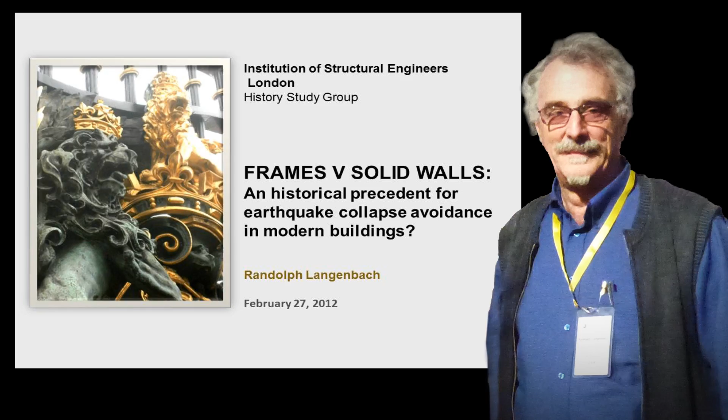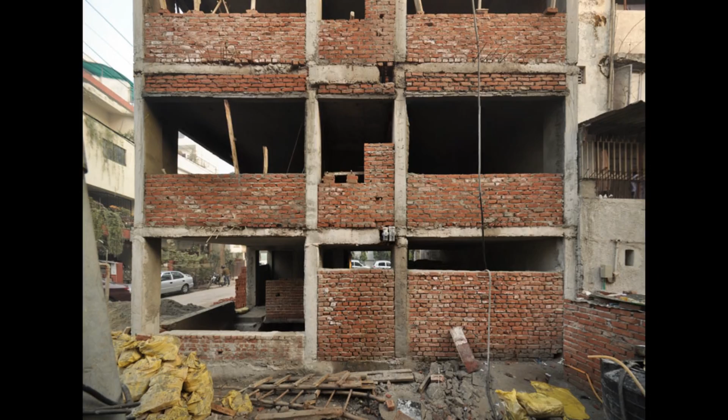So here we now move forward. In my talk, I'm going to be talking actually quite a bit about modern buildings. By modern, I mean built in the last 50 years or so, rather than just looking at things historically. But I'm going to be making a crucial comparison.

As you've seen in the last 4 or 5 months, we've had a series of earthquakes, and one in eastern Turkey, in Van. What are the images that are coming out? They're concrete buildings. Not only have they fallen down, it's really with concrete frame construction that the term pancake collapse was invented, because the floors are so strong.

And of course, when they do fall down, it's very hard to extract the survivors, because the floors, as you see here, often very thick, are so hard to even drill through.

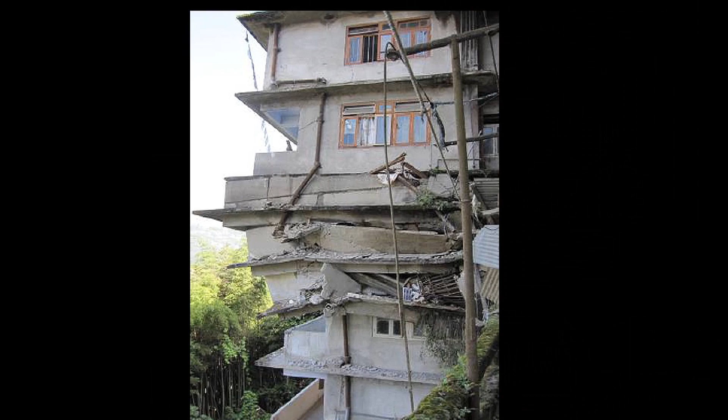The Van earthquake reminds me of the 1999 earthquakes further to the west in Anatolia, where it's building after building on the ground. And then very soon after that, the one in Sikkim, in the Himalayan chain in North India, which extended with damage in Bhutan and in Nepal. Same thing, concrete buildings.

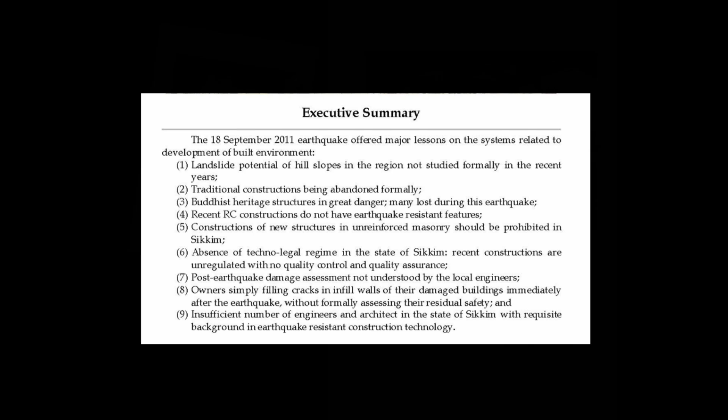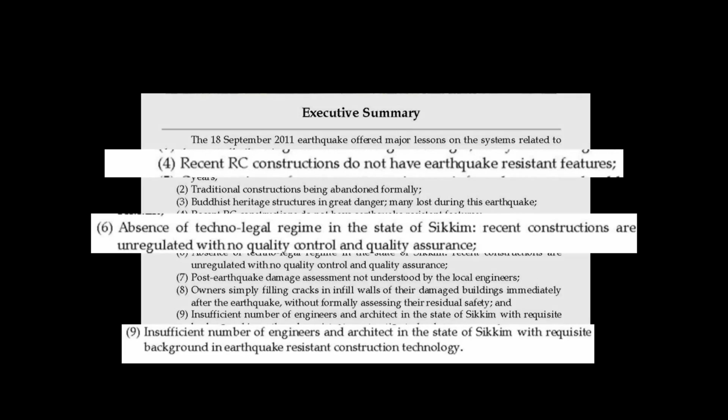Now, it's really interesting to look at the professional reconnaissance report that was done by an engineering team, the Indian engineers who went there to look at it, and I do know one of the engineers on this team. Not only are they observing that the reinforced concrete buildings don't have earthquake-resistant features, and remember, the Himalayan chain has been identified as an earthquake hazard area for generations, they don't even have structural engineers in that part of the country.

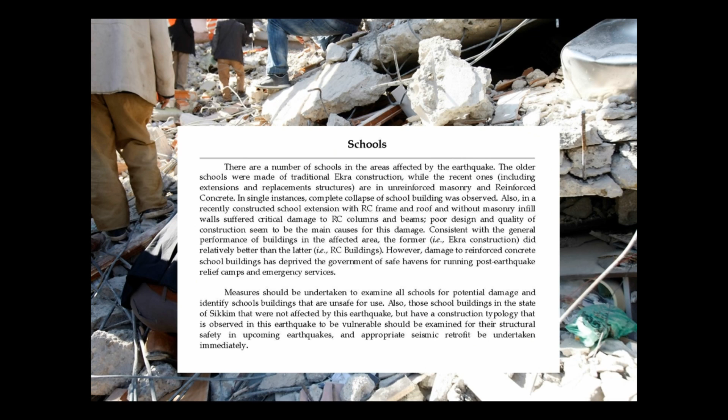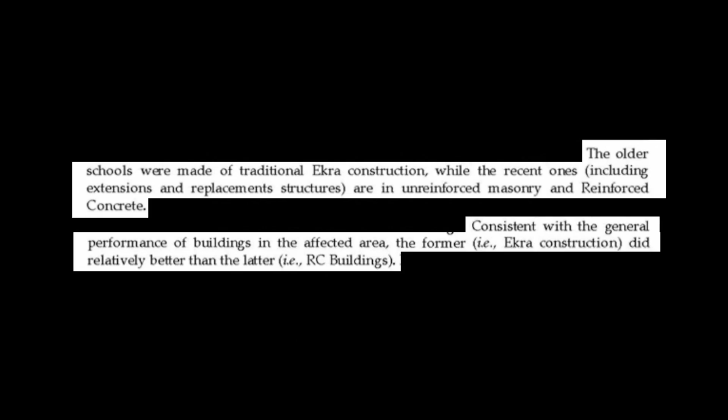So in this report, they recognize this traditional Ekra construction, as they call it there, which from what I could tell is a little closer to wattle and daub medieval construction here than to infill masonry. But never mind, it's easy to then keep going and realize that schools are one of the most vulnerable assets we have, and it puts all of the children at risk, whether it's Italy or India or Turkey or you name it. We've had schools being a particularly vulnerable building type.

But you'd think that they would do better with modern buildings. And in India, there's the terms PUCCA and KATCHA. KATCHA for cheap or impermanent construction, and PUCCA for permanent construction, which is now often identified by people as being reinforced concrete or concrete block masonry.

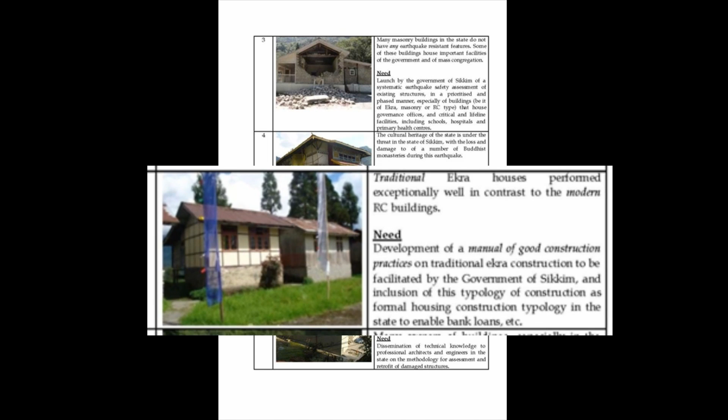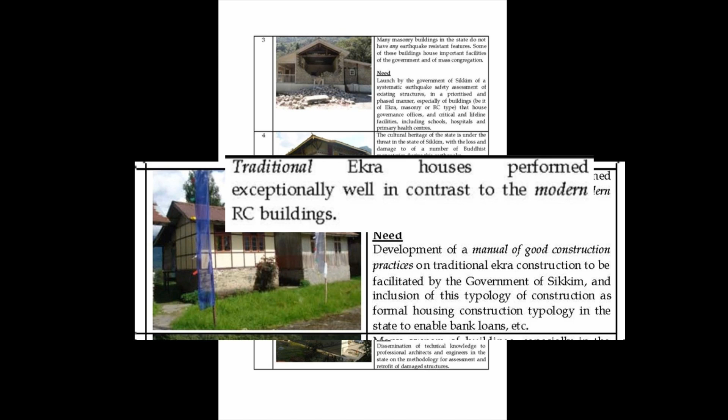Well, look at what their observation is. The Ekra houses are the ones that performed. Traditional means of construction that this report even advocates be resurrected in this area and put alongside modern concrete construction, which itself should be improved.

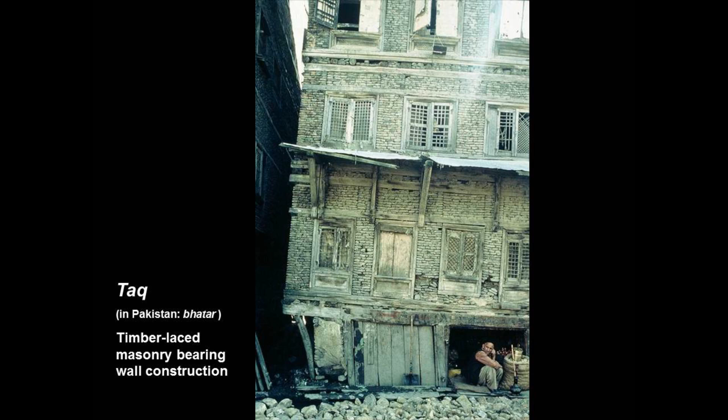We shouldn't use the term archaic construction anymore when we're dealing with this, because it has so much to teach us in terms of how we even improve our current forms of construction. So moving on, that's one of the pictures that I shot in 1981.

And I often have shown this at the beginning of a talk and say, you know, how can you ever believe that this would be earthquake resistant construction? Never mind, is it even resistant to static failure?

So, when you get into it, you even see that the masonry piers do not line up, which would be anathema in a bearing wall masonry building. But this is bearing wall masonry, and by all calculations, that would be a soft story. And so the timber is so critical here.

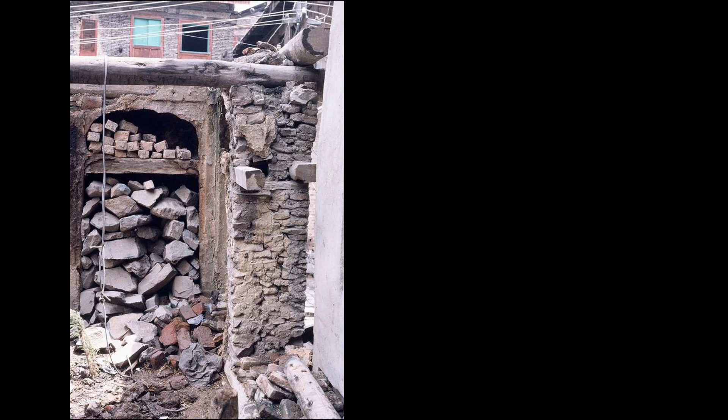We are dealing, in fact, with reinforced masonry construction, but coming from a building tradition that goes back hundreds of years in an area of northern India where timber does exist, does grow. It's a mountain climate, and the Vale of Kashmir is a fertile plain. The reason why these buildings were there is because it was a fertile plain, but it was a prehistoric lake bed, much like Mexico City is a lake bed, and so this is an extremely soft soil site.

This construction was not invented for earthquakes, I believe. I don't have any proof one way or the other, but it was invented for building buildings that would last on a soft soil site. And that's why I think we're seeing the timber armature there. And you can see the effectiveness of this when you realize that this building here is a bearing wall masonry building. It's not a veneer, it's not a frame structure.

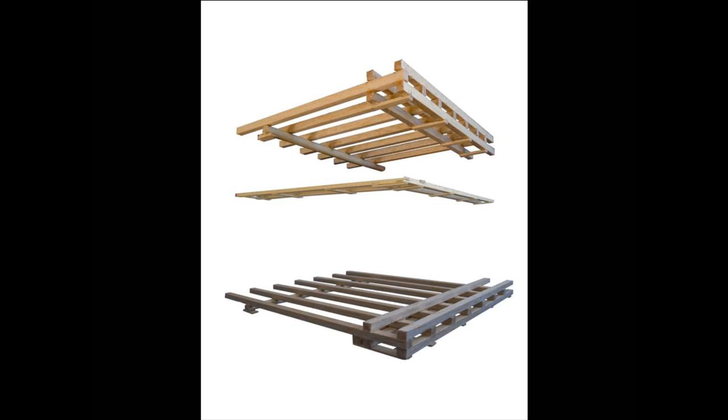So how is that done? This is what I determined is the way those internal frames work. They've been very effective in creating, through just the weight of the wall, a tie-in with a floor diaphragm, which is all, of course, appropriate for contemporary construction today. And that's where they fit, above the windows and at the floor levels in many of these structures.

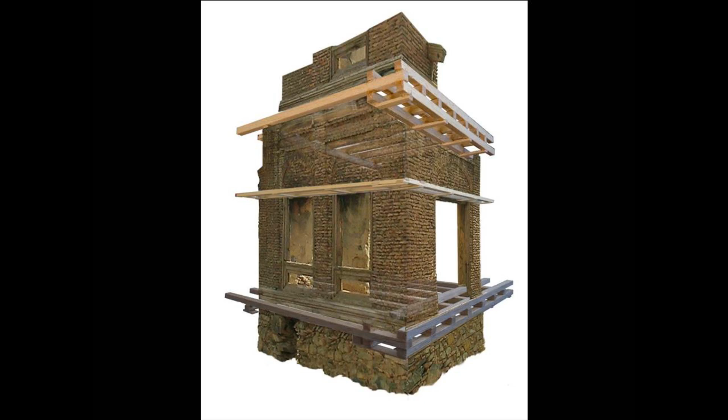This, I determined the best word they had for it was taq construction, which was not exactly an engineering term there, but I found no other. It just seemed to be a construction technique that people did. Looking at the buildings, we're not dealing with short buildings here. They went 3, 4, 5, sometimes 6 and 7 stories, and these are bearing wall buildings.

This one here, you can see where the floor beams are extending through the wall and being sandwiched between the timbers front and back of the thickness of the wall. Absent this kind of structure, you can see that the buildings tend to come apart just from the soft soil site.

And in 1885, there were historical records where visiting British travelers commented on the earthquake they experienced, that these seemingly rickety, tumble-down buildings had resisted the earthquake, whereas the palace in the more British style of unreinforced masonry had fallen down. At the time when I discovered this, I'd never myself investigated earthquakes, I'd not been in a reconnaissance, I'd not really studied contemporary earthquakes. That has come in the last 30 years since I first went there.

Turning to Nepal is very interesting because they don't share this building tradition, even though they share a part of the real estate of the mountains of the Himalayan chain. You see an example here of how the whole building in Srinagar is leaning as a unit, and here in Kathmandu, in the absence of having that kind of ring beam or a tie around the whole building, the building tends to come apart.

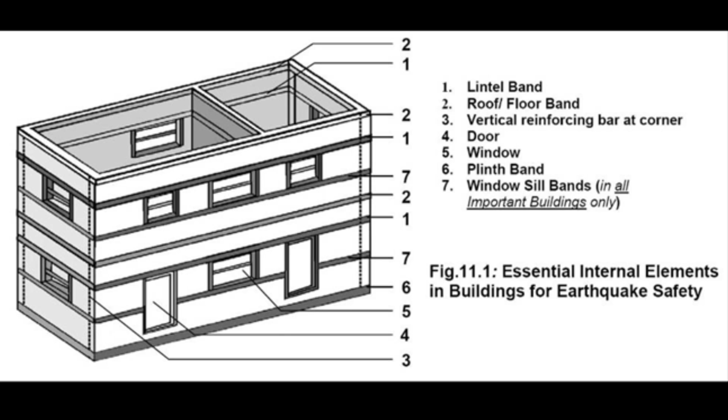But what I found interesting, and some of you who've been involved perhaps with India may know Professor Anand Arya, who was instrumental in getting this material into the code and recognizing essentially what they call rules of thumb for traditional construction, non-engineered construction as they call it, in India, because it's so fundamental to housing the people.

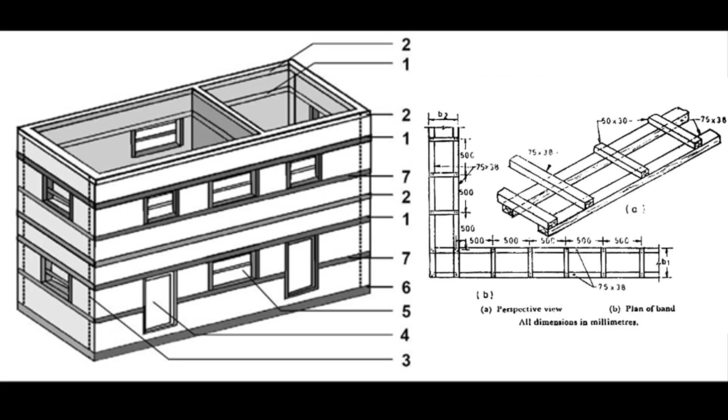But for some reason, they don't recognize the floor capture, the double layer of timber with the joists and the beams coming through. And I've never been quite sure why. In my conversations with him, I think it was just something where they would themselves know it, but hadn't really gotten into that level of detail.

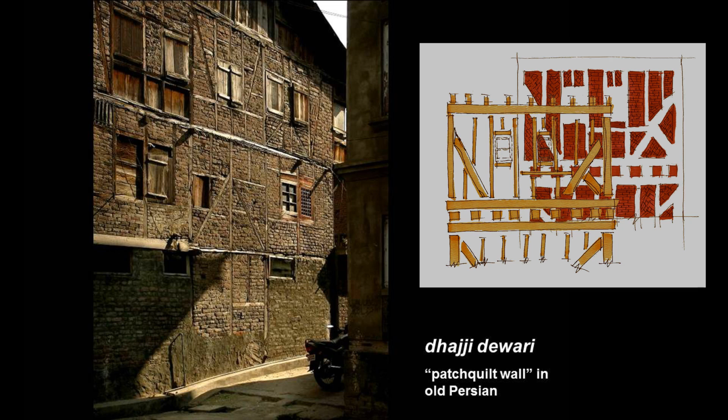So the other system is known as dhajji dewari, and this is a much more appropriate term to the system. It comes from their textile industry background, patch quilt wall, from what it looks like. But that's really interchangeable with the English term of half timber. And you find Fachwerk in Germany and Colombage in France and so on. Almost every society in the world has a version of this form of construction.

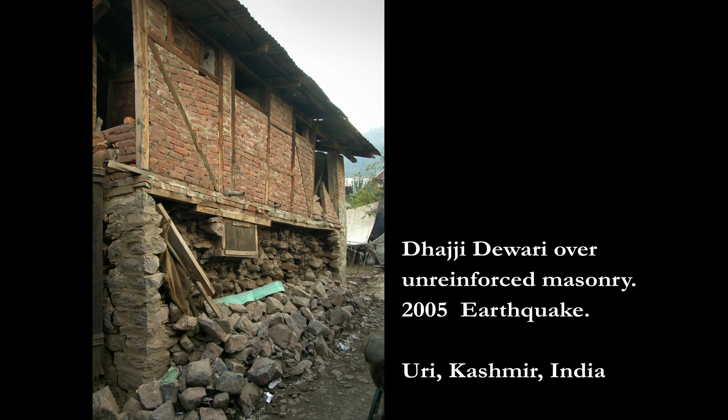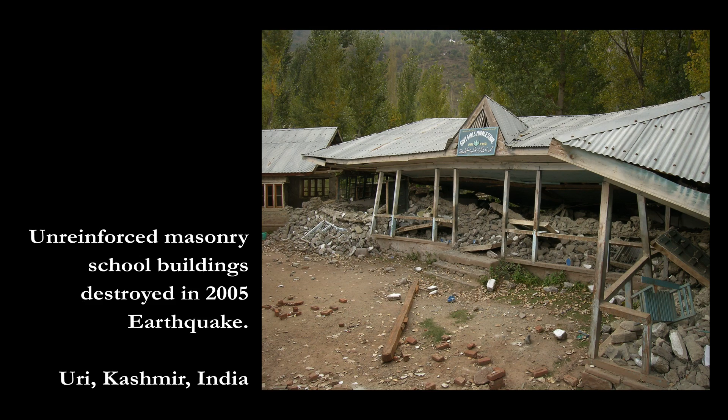Now, the first demonstration in my lifespan where I could look at the performance of this in the field was, of course, the 2005 earthquake in Kashmir, where the epicenter was in Pakistan, and I'll get to that a little bit later. But on the Indian side of the border, in Uri, I did find this example, and you see that the dhajji floor, only at the top, where it was unreinforced masonry below, that floor formed a bridge over the failure of the wall below.

Again, interestingly enough, it is recognized in the Indian Building Code. But like the other one, it doesn't talk about the floor diaphragm connection.

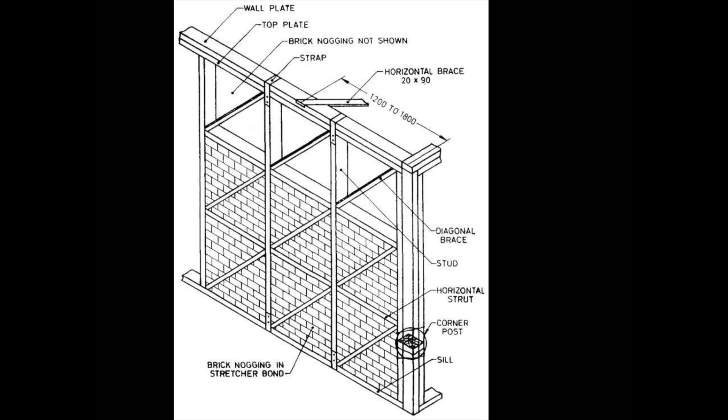Now, one of the first and one of the very few examples I have where this is specifically an invention to resist earthquakes is a product of perhaps Europe's most famous earthquake, not in Italy, but in Portugal, the 1755 All Saints' Day earthquake. It happened when everybody was in church. So you can imagine when the churches all caved in and killed their occupants, how this became almost a mystical event. And looking at the science of it was probably the last thing on many people's minds.

And then it was followed by a fire. And then that was followed, after everybody ran out of the area that was burning down to the pier to take boats across the harbor, by a tsunami that came in and drowned them. So it was this 1, 2, 3 punch that just turned this into quite the event for all of Europe.

After that earthquake, the Marquis de Pombal, or who later became the Marquis de Pombal, who was the king's right-hand man at that time, took on himself the task of getting all of the best minds, all of the best engineers in Lisbon together to come up with a system that would be earthquake resistant.

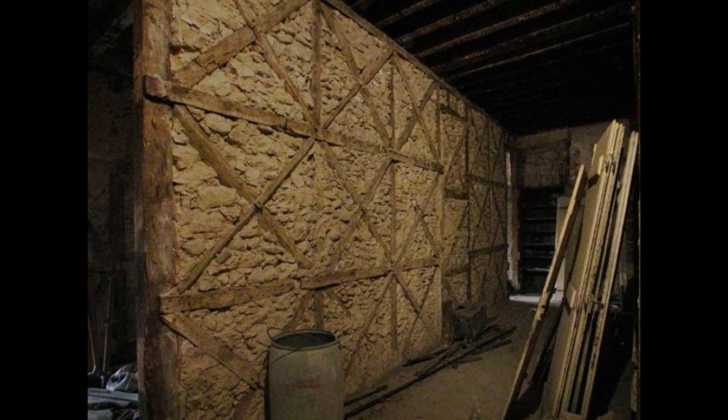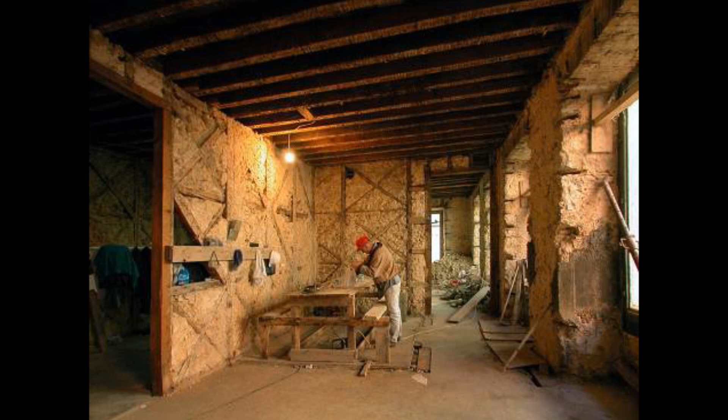Interestingly enough, what they chose to be that system is infill frame masonry, just like I showed you in Kashmir, and not unlike Fachwerk in Germany or half timber in Britain, but a very robust form with double X's in it. And there's not really very good records on this. I believe what they did is they simply did an empirical study.

This is not a mathematical study. It's an empirical study, as we often do, like EERI teams to earthquake areas or other reconnaissance teams. What you do is you go and you gather the evidence from the earthquake. And what did they do just walking around the city? They noticed the medieval parts of the town that had half-timber construction didn't fall down.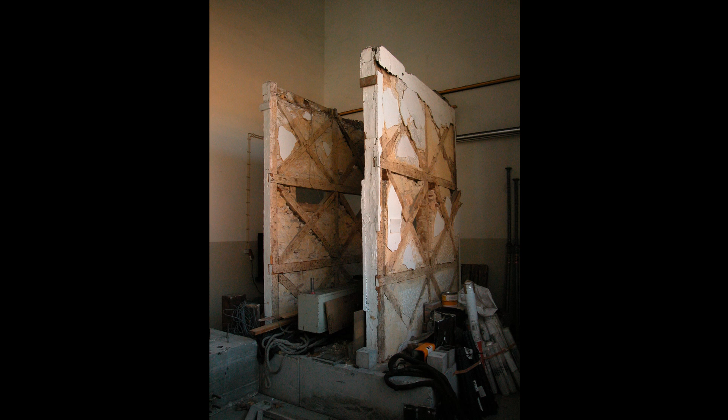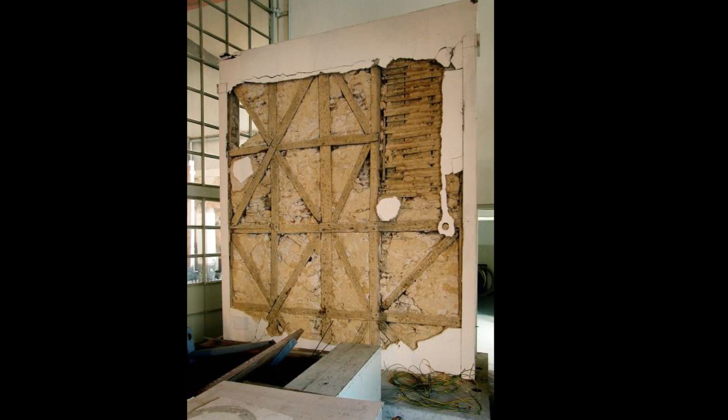But the unreinforced masonry buildings did, and the churches certainly did. Well, interestingly enough, in just the last few years, the government of Portugal and the engineers working on a government funded project took out some of these frames from buildings that were being renovated, where the frames were being lost, and put them on a stress test, a pseudodynamic test machine that they have in their government lab.

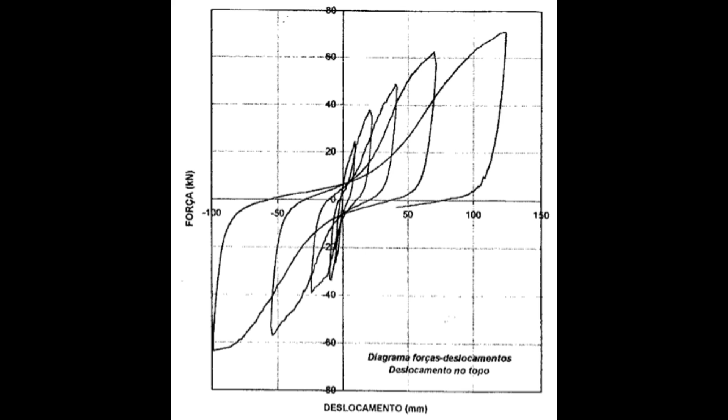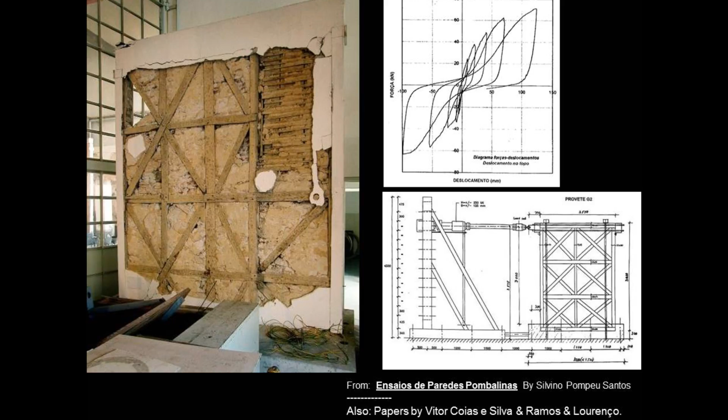And this is the hysteresis loop that came out of one of those tests. In this particular case, the equipment got to the end of its thrust before it ever got to the limit of the strength of the specimen. So the performance of this is seen with a tremendous amount of damping effect in it, of hysteresis damping that comes from this material as it's moved back and forth in the earthquake.

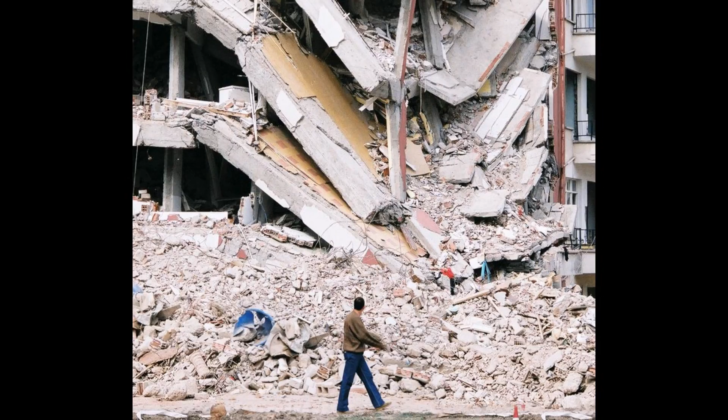Now I'm going to just take you very rapidly through a series of earthquakes that I've been able to visit and see the results from. And of course I mentioned before the one in Western Turkey. But tucked in among these buildings were buildings that were often not recognized or put in the reconnaissance reports. My colleagues in EERI in the US had come back and I said, were there any timber frame buildings that you saw there? And they said, well, there were a few. I saw them, but did you take pictures of them? No, I wasn't interested. We were looking at concrete and so on and so forth.

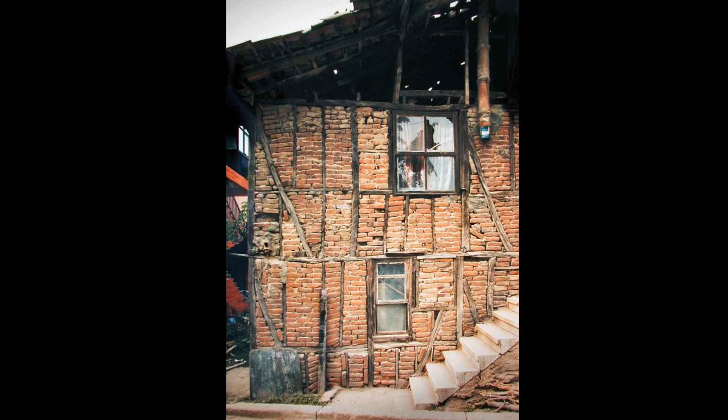So I got on an airplane, went over and had a look, and here's a 3-story one. And there's no way you would classify these buildings, even in their original construction, never mind current 100-year-old or 75-year-old condition, as good construction, as a premium in terms of craftsmanship. Very often these buildings look older than they are. They were built by people themselves. They were not built by people who'd gone to school in construction or by companies or engineers.

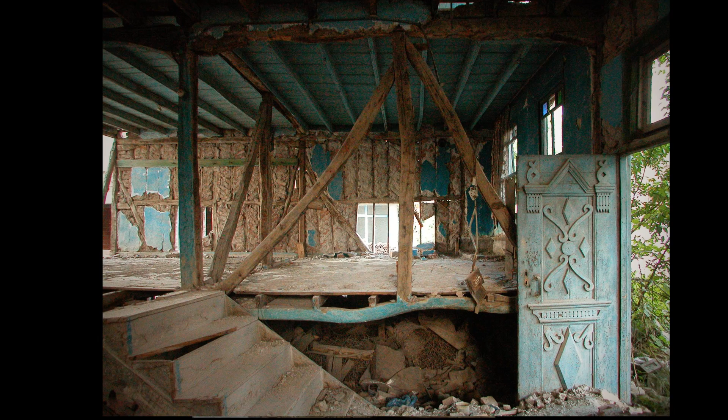This is non-engineered construction. And what you're looking at here is not a building that was damaged by the earthquake, but one that had the back wall quarried away for building material because it had been abandoned for something like 20 or 30 years. And it was in the heart of the damage district. The earthquake couldn't take it down even when it was in this condition.

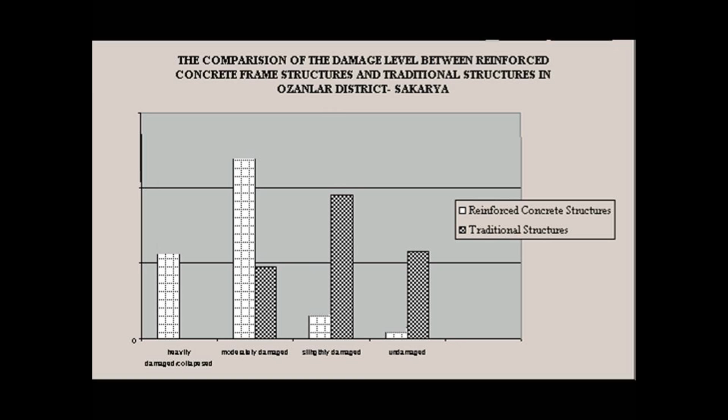Well, it's one thing to go around as a reconnaissance photographer and look at these things on the fly, but there was a research team in Turkey that did a quantitative study. And they, in my mind, unfortunately, lumped together all traditional buildings, including unreinforced masonry construction, into the bars you see on the right, and on the left is the reinforced concrete frame building. So embedded in these bars on the right are the hımış buildings, probably with even better performance than other traditional buildings that may not have performed so well.

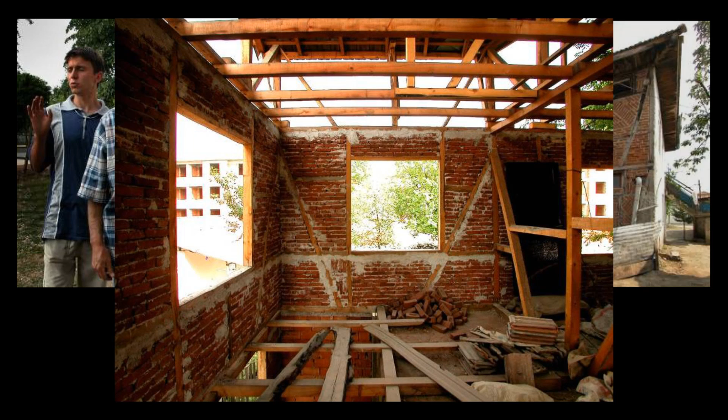So we have one example here of a family I ran into when I was in Düzce. This man had started construction on a reinforced concrete new house for his family. And they were living in the house his father had built, which is seen there. This is after the Düzce earthquake. And he stopped construction when he saw that the concrete buildings in Düzce had collapsed and built himself a hımış-style new house. I thought this was a remarkable example of how people learn and how a tradition can be resurrected when an event as rare as an earthquake comes through and affects it.

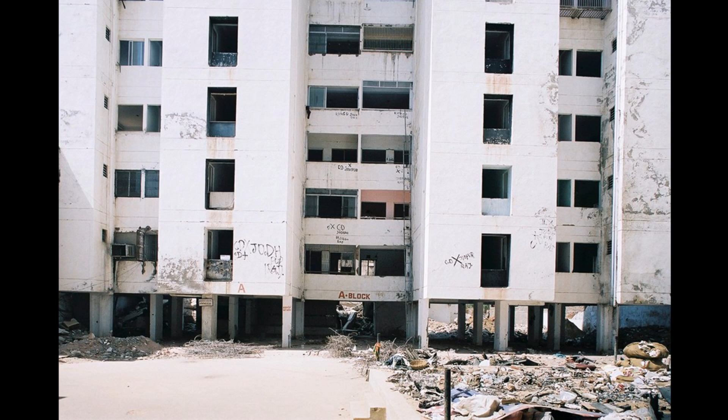And in Ahmedabad, if the concrete building was built subsequent to 1992, it had a much higher chance of collapsing than if it were built before 1992, as counterintuitive as that might seem. And that was for a simple reason. They made a zoning change that gave them more floors credit if they put parking underneath. Excuse me? I mean, this had historically been a known earthquake area. In fact, the earthquake return period there had been remarkably frequent for an area that was mid-plate.

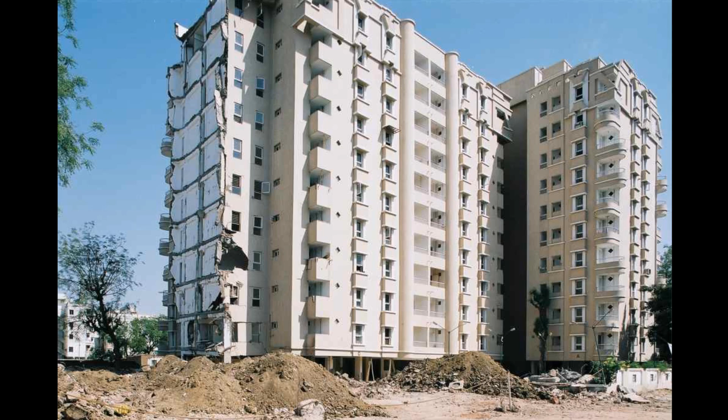So you see, half this building had collapsed in a pancake. The other half is effectively destroyed. The bottom columns, it was scary even to go under there and have a look.

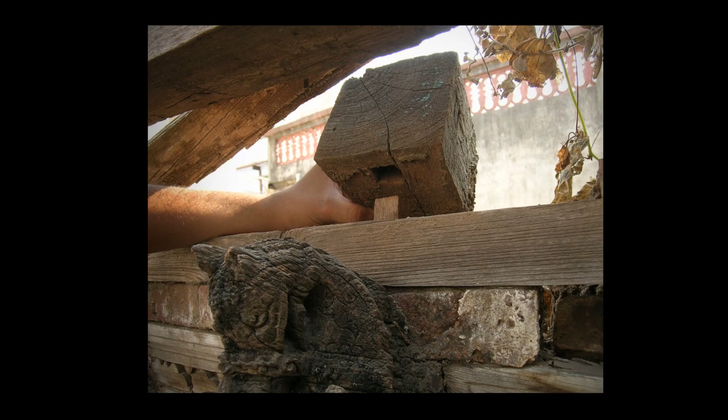Why the difference? Well, there was a cultural flow of construction tradition that flowed into Islamic Ahmedabad of the Mughal period that didn't really go into Hindu Bhuj. And it's not a religion thing, it just seems to be cultural byways and highways flow.

But there was a Hindu sect that had their home temple in Ahmedabad, known as the Swaminarayan sect of Hinduism. And they had built a building in the Ahmedabadian tradition in Ahmedabad. And they then also had a temple complex in Bhuj, and they used the same Ahmedabadian building tradition in Bhuj.

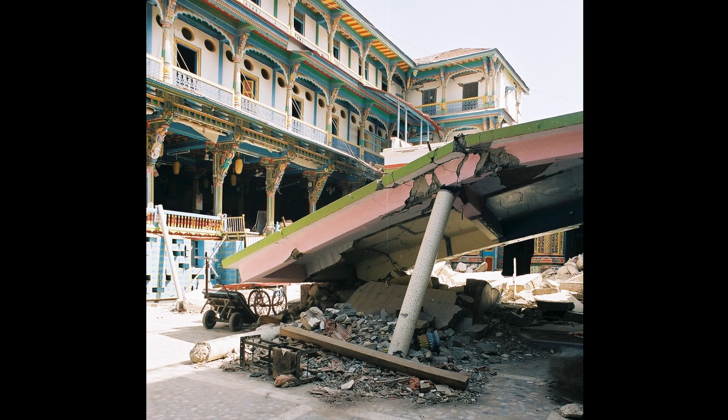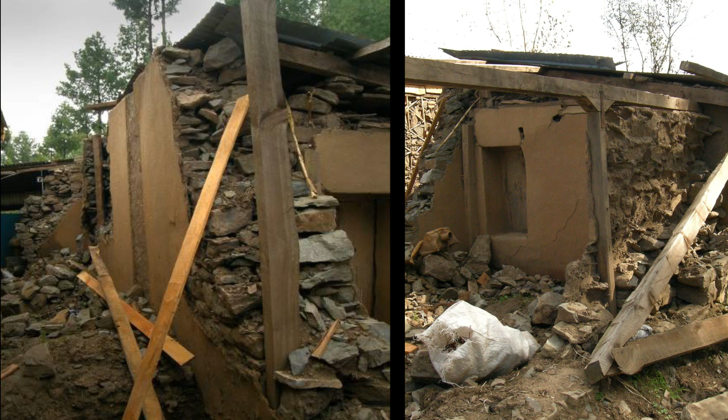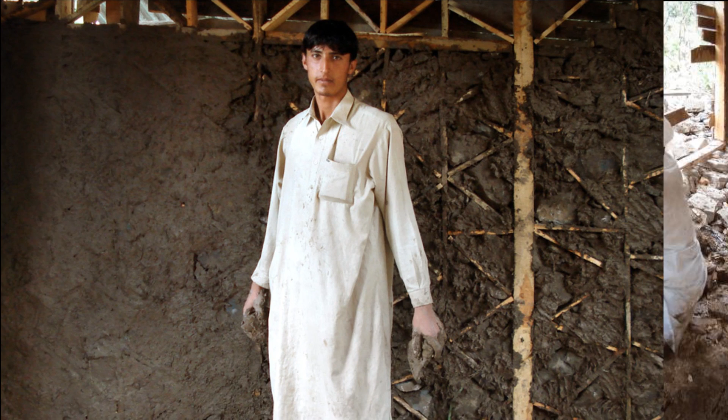The mountain form of traditional dhajji construction is more of a stud frame with these small, short pieces and tiny panels, which I think evolved out of the fact that they use rubble stone as the infill. So the smaller the panel, the more frequent the timber reinforcing, you get a very good holding of the system together. And the amount of damping that comes from this in the event of an earthquake would be quite large, and the chances of the building falling down from the panel falling out are even less.

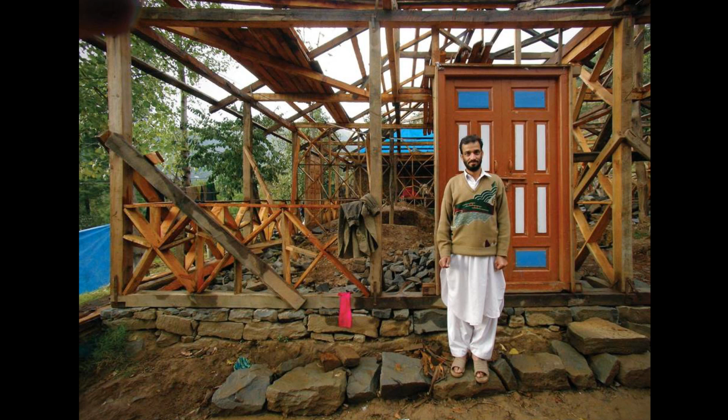People were proud of this. The government had told everybody that they would get financial assistance if they built in reinforced concrete or concrete block according to the rules that had been established by their engineers. And if they built in any other system, they would get none. At the time we examined this, it was about a year after the earthquake, they went ahead and built anyway. At that year point, the government approved, after several of my colleagues in NGOs had been campaigning to approve this form of construction.

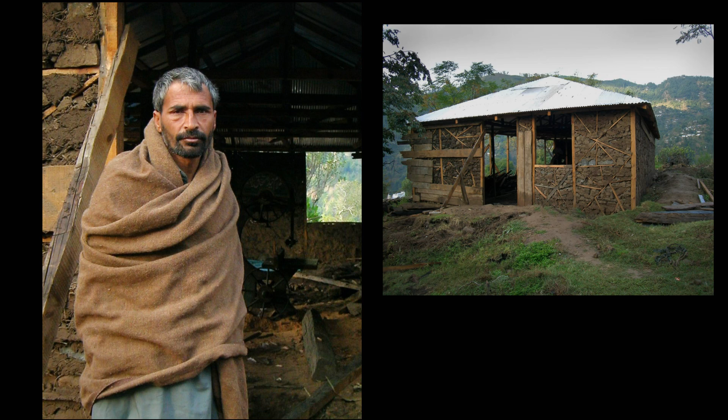I show this picture because this fellow is even deeper in the rural countryside. And there's something really wonderful about the poise of this fellow. I mean, he probably has not spent a day in school. He's never been trained in construction, presumably, but he's rebuilding his own house in this way. And I kind of see a wisdom in his face. Not knowledge, but wisdom. And I think that's what's so profound about getting into this level of seeing how people relate to their environment and then take control of their own recovery.

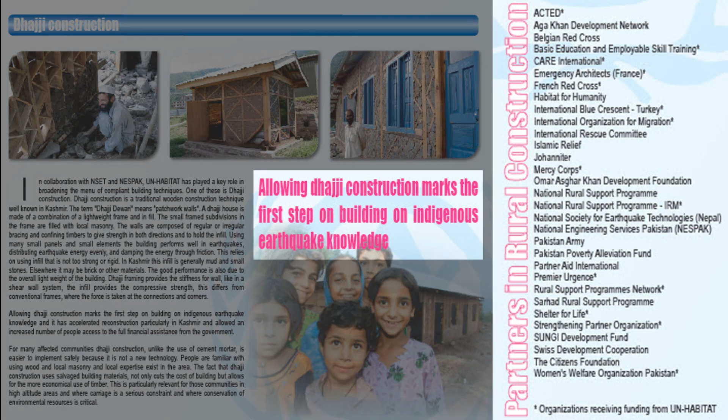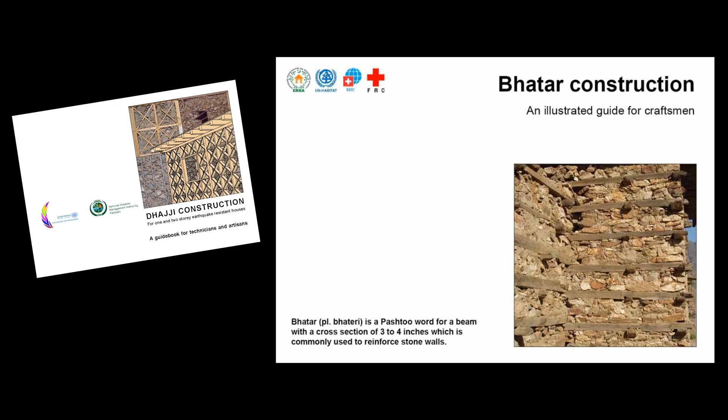And the government of Pakistan, to their credit, finally recognized this. And then my colleagues in the NGOs, particularly this architect from Switzerland, Tom Schacher, who is now in Haiti doing similar work, put together a manual of practice for improving the detailing of these buildings, but working within the tradition that he learned from them. I think that's what's so important, that it's a two-way conversation.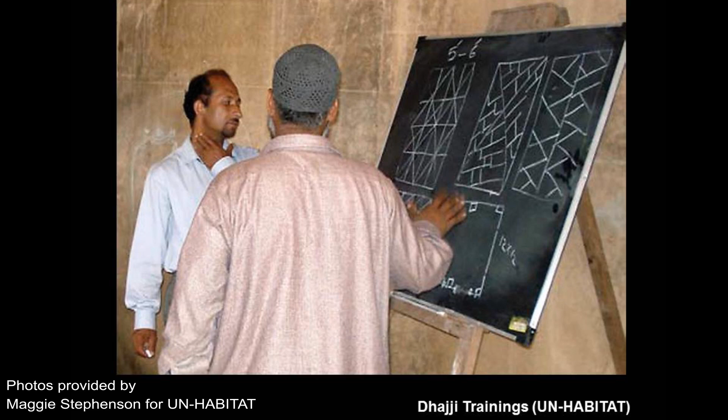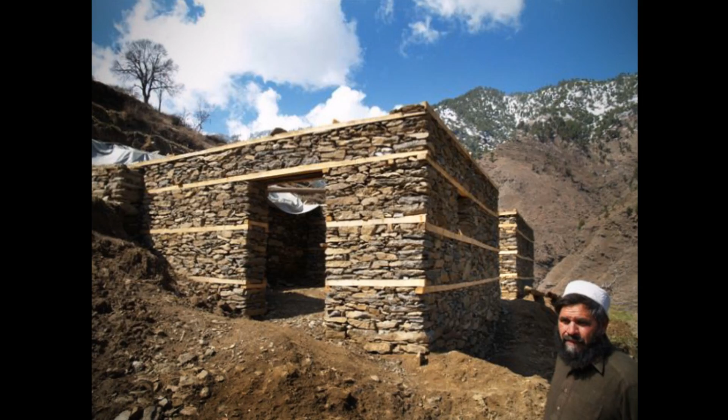And here you see some of the lessons undertaken with these rural farmers, basically. And they then, one year later, approved the bearing wall system, which there in Pashtun is known as Batar. And so these are new houses. Over 200,000 new houses in dhajji have been built, I've been told, by UN Habitat.

So I want to conclude the talk back to from big to small here, and just leave you with the experience I had in rural Turkey, where these little villages were hit in an earthquake that was 6 months after, and a year after the big earthquakes that you've all seen or read about in Western Anatolia, the Orta earthquake of 2000. And I happened to be driving to go see the historic city of Safranbolu when this earthquake happened.

I got a phone call on a cell phone, and I got there within less than 24 hours of the time when the earthquake happened, and have pictures of these houses, which are of traditional himis construction. Well, the government officials and inspectors came in and persuaded the occupants of this town that their buildings were essentially destroyed and they're better off tearing them down and moving to new houses that they will fund.

And in a neighboring town, there were two towns this happened, this is the subdivision the government built, because the geologist said that this site was safer than where the village was down by the creek. No barns, no place, and not even agricultural soil left on the site. And they put these houses here, 80 houses, that the poor owners were persuaded to accept as a program for rehousing them, and even partly pay for.

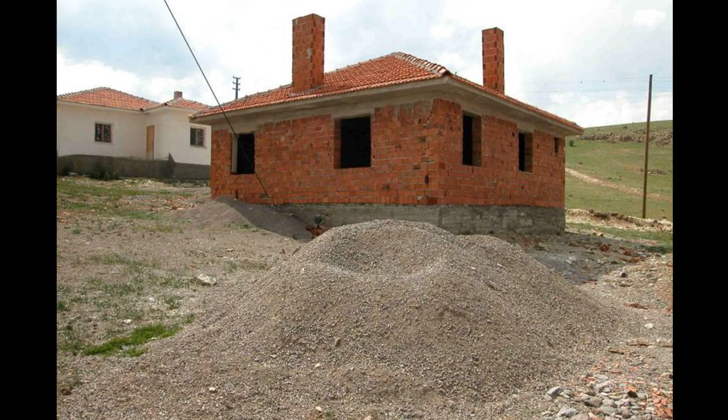They were never occupied. Only 5 of these houses, 5 years after the earthquake, were occupied, and the population had risen to 7, and 2 of them moved back to the village. Because there was no mosque, there was no store, there was no place to put your animals. On top of that, that was the system of construction. Unreinforced masonry, hollow clay tile block with a heavy concrete roof. Excuse me.

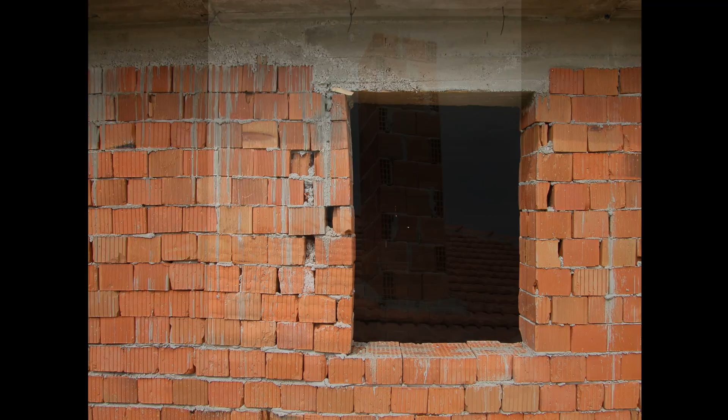How did they get from a good performing construction to think that this is better? The reason is that these inspectors looked at the debris field of all the plaster falling off and the movement that these buildings did, which I consider to be their way of resisting earthquakes, which has to create damage of that kind of nature, and saw it as their being destroyed.

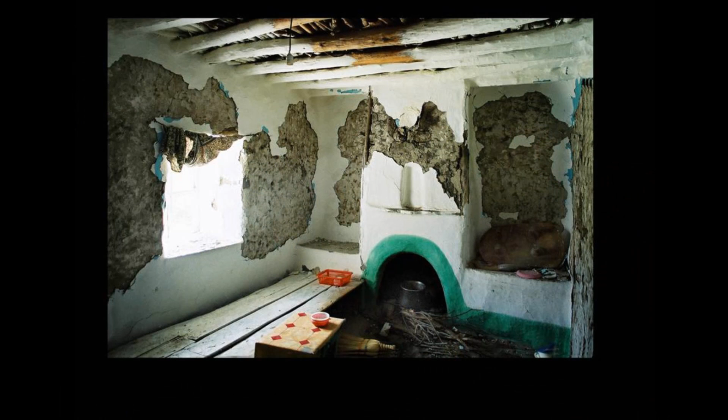And within my first visit, this is my picture of the family having come out of their house because of the damage, the same kind of damage you saw before, which you see there. They were scared of it and they were in a tent. But these were younger farmers. They spurned the government edict that they should move and repaired their houses themselves. And I came back to find them having moved back into it. And this is the change these houses went through.

So the problem for disaster relief people is the disasters are so far apart that it's a whole new host, a whole new generation of people with each one. And the learning process, I think, the passing on of this kind of aha moment, oh, maybe that isn't good policy, does not happen. They start over again, and with the best of intentions, produce something that takes away more than it gives.

And I want to leave you with that observation from all of this. We're back down to the people in the village who, in the end, in order to recover, are best able to recover for themselves, to rebuild their own houses. And we can look on and learn from them, and then give back something after we've learned.